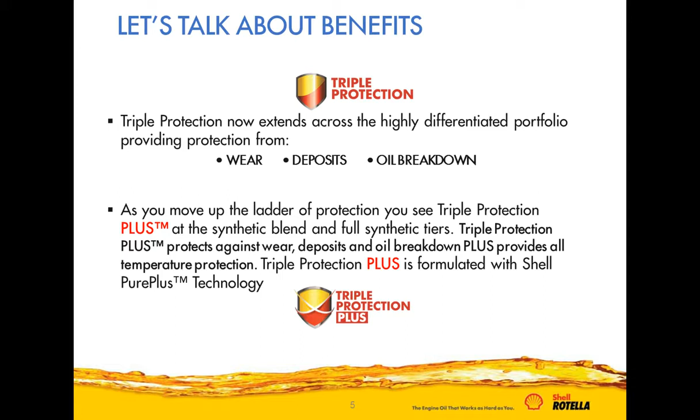The Triple Protection Plus formula's 'plus' represents Shell PurePlus technology, which is our gas-to-liquid technology. We'll talk about that more in a moment. This is a really nice summary of what Triple Protection Plus technology stands for, and a handy tool so our customers can understand the features, advantages, and benefits.

So what does it mean to you? As I said, it represents wear protection, deposit control, oil breakdown resistance, as well as all-temperature protection. A customer would care about those things because they represent enhanced engine protection, extended oil life, and better fuel economy, all of which represent a lower total cost of ownership for our customers. Again, Shell PurePlus technology is where the plus comes into play with Triple Protection Plus.

Combined with our advanced additive technology, this is what delivers all of these features and benefits. Matt will go into more of the technical details behind them.

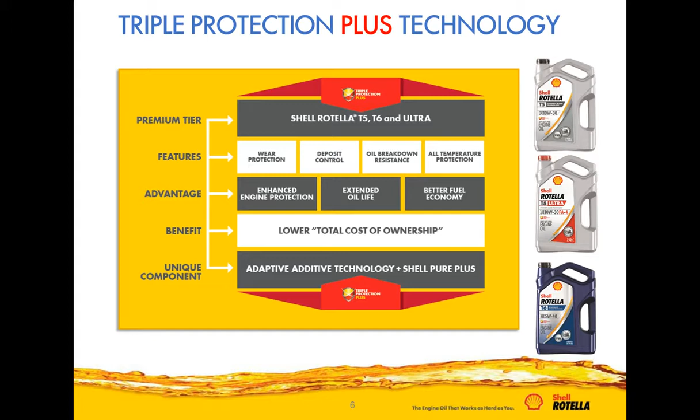So Shell GTL, or gas to liquid, is a process that converts pure natural gas into a first-of-its-kind synthetic base oil. We're using this in the Shell ROTELLA synthetic blend and full synthetic line of products. It's a complex process to develop GTL base oil using a modified Fischer-Tropsch reaction, which converts natural gas into liquid hydrocarbons. The result is Shell PurePlus base oils that are crystal clear and 99.5% pure.

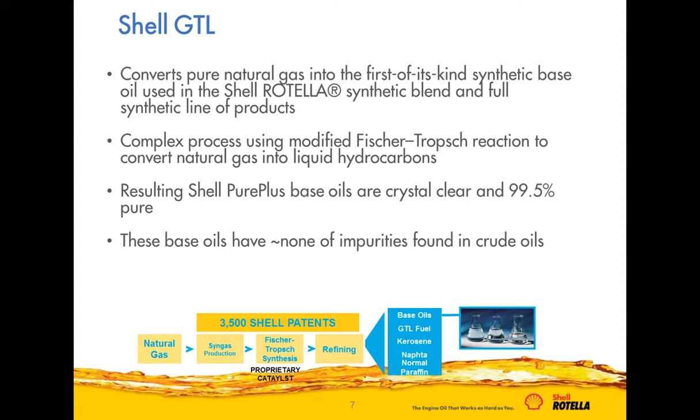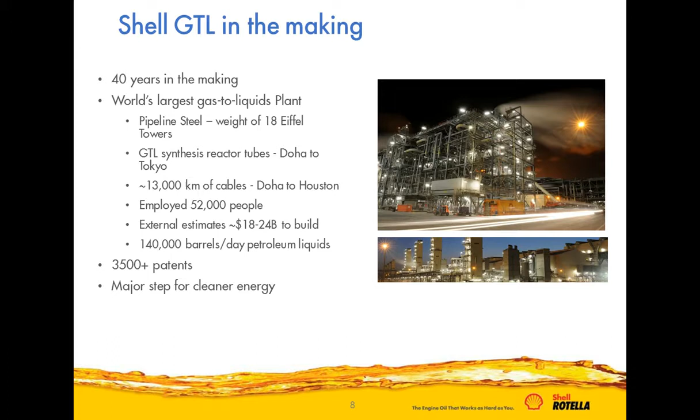Shell GTL has been 40 years in the making. We make this at our Pearl plant in Qatar, the world's largest gas-to-liquid plant. It was a huge endeavor employing 52,000 people, and we have over 3,500 patents behind this technology. It was a major step for cleaner energy and a great resource for us to leverage in our synthetic blend and full synthetic products.

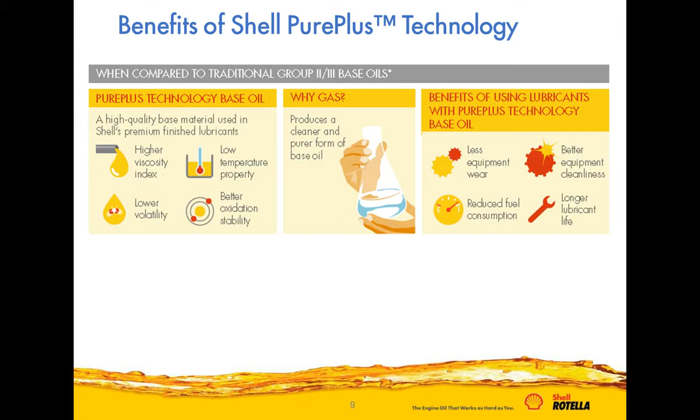Some of the benefits of Shell PurePlus technology include low temperature properties, better oxidation stability, and lower volatility. Those benefits, combined with our advanced additive technology, are what deliver the superior products we have for Shell ROTELLA.

Shell ROTELLA T5 Ultra Synthetic Blend 10W30 is our new synthetic blend that meets the FA4 specifications. This product will launch and be licensed as FA4 starting December 1st. The benefits are similar to ROTELLA T5 Synthetic Blend 10W30 CK4, but with enhancements in better fuel economy. We'll talk a lot more about this product on our December webinar.

We'll also be talking about the OEMs and the decisions and announcements they will have made by that point regarding what they recommend and allow in their 2017 and beyond vehicles, as well as any backwards compatibility. That'll be a great webinar to attend on December 12th, so look out for that invitation where we'll go into a lot more depth about this product.

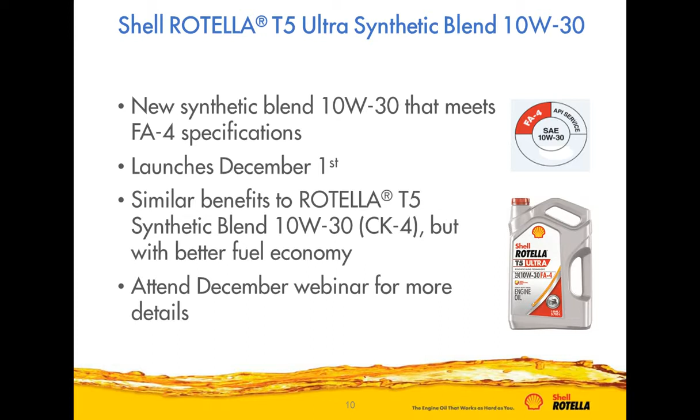So Shell ROTELLA T6 Full Synthetic. I want to talk about these products a little bit. We have 3 full synthetic products: Shell ROTELLA T6 Multi-Vehicle 5W30, one of our new products we'll talk about today, as well as Shell ROTELLA T6 5W40. Both of these will meet CK4 specifications.

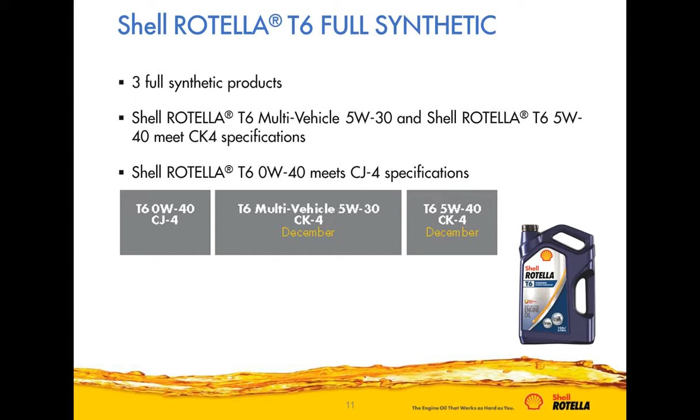And then we have Shell ROTELLA T6 0W40. That product will meet CJ4 specifications; it will not meet CK4 at this time. However, we do have plans to reformulate that product to meet CK4 in the near future. Today we'll be focusing on ROTELLA T6 Multi-Vehicle 5W30 and ROTELLA T6 5W40.

A little bit on the strategy behind Shell ROTELLA T6 Multi-Vehicle before we get into the technology story. First, remember that this is first and foremost a diesel engine oil. We do have multi-vehicle in the name, and there's a reason for that—this product will meet both diesel and gasoline engine specifications.

So it will carry the API CK4 and the API SN performance standard designations. But again, remember it's first and foremost a diesel engine oil—that is ROTELLA's heritage and legacy, and we are not straying from that. Some key benefits are that it contains Triple Protection Plus technology, excellent high-low temperature protection, and delivers a fuel economy benefit of 2.8%. We're really excited about that percentage compared to a conventional SAE 15W40.

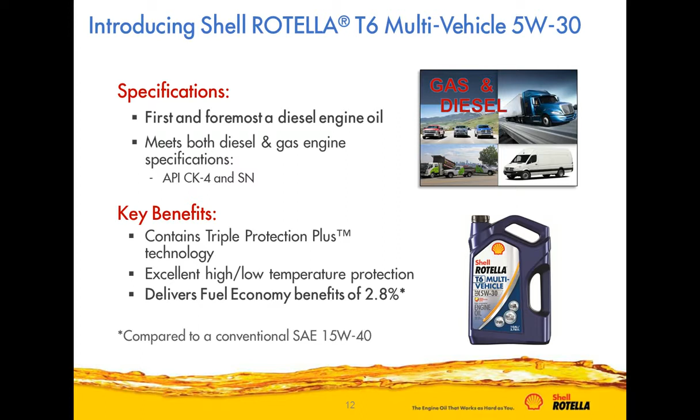Matt's going to go into a lot more depth about the technical benefits of this product in a moment. But I'd ask you, as you're listening, to remember that this is primarily a diesel engine oil, but there are a lot of applications where it will be very beneficial for our customers to run in gasoline engines as well.

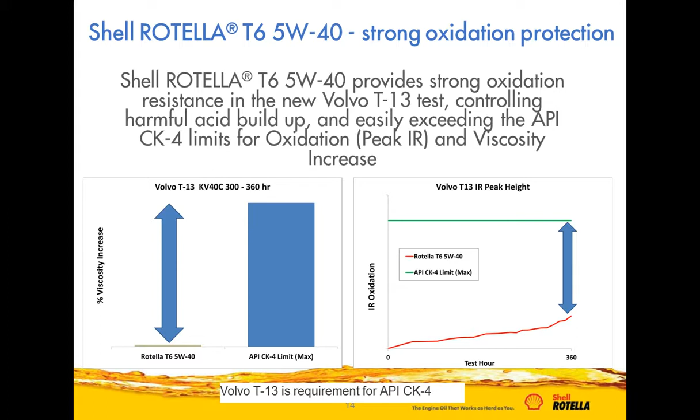There are two parameters for the Volvo T13 test: one is oxidation, or IR peak height, shown on the right-hand side, and viscosity increase over the last 60 hours of the test, shown on the left. The CK4 limits are shown in both charts, and you can see clearly the differentiation we have with this product from the API CK4 limits, both in terms of viscosity increase and IR peak height. So, very strong performance in this demanding oxidation test.

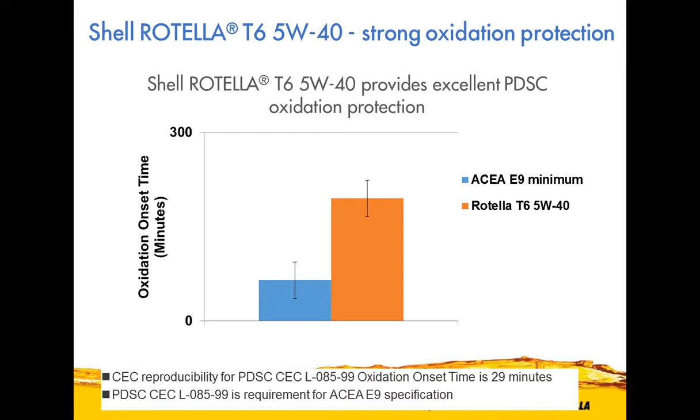In terms of a bench oxidation test, the common oxidation test is the PDSC. This is a requirement in some of the ACEA specifications. What you can see here is that ROTELLA T6 easily meets the ACEA E9 minimum, again showing very good differentiation within our portfolio as a very strong oxidatively stable product.

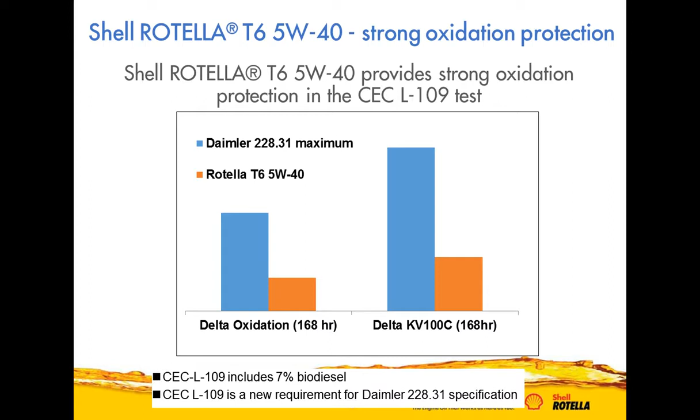There's another bench oxidation test called the CEC L109 test. This is a new test that's part of the Daimler, or Mercedes-Benz, 228.31 specifications. This test actually incorporates 7% biodiesel, making it even a bit more severe than a normal bench test. I've shown the limits for the 228.31 in blue, and where the ROTELLA T6 5W40 results come out. Again, very clear differentiation from the limit—strong performance in this test and in the presence of biodiesel.

What we've done here is look at PDSC oxidation tests, but we decided to stress the oil first and see what happened to the oxidation performance. One of the tests required for API CK4 is the HTCBT, high temperature corrosion bench test. We didn't just take that standard test—we took a double-length high temp corrosion bench test, and evaluated the PDSC at the beginning and at the end of the double-length test.

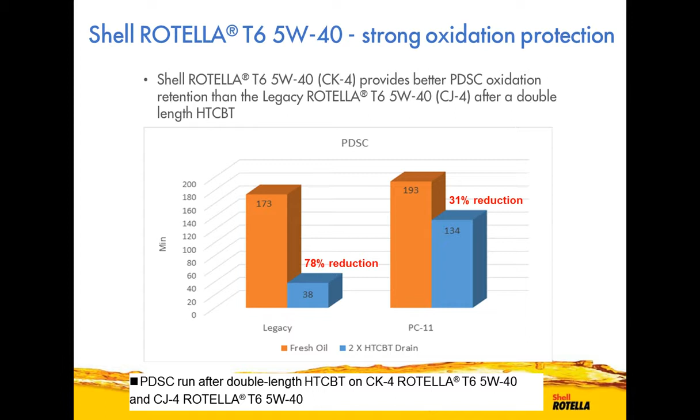I'm showing the legacy 5W40 product on the left—that's the API CJ4 formulation currently out in the market. On the right-hand side, you see the PDSC results from the new PC11 CK4 formulation. After even a double-length HT-CBT test, we're only losing about 31% of our PDSC value for the new formulation, compared to about a 78% reduction for the old product. This demonstrates that the new product is more robust in terms of oxidation protection throughout the oil life and under extreme circumstances that may be encountered in your engine.

We took that same double-length HT-CBT test and looked at the corrosion protection of the new product versus the old product—this is copper corrosion. Past 168 hours, which is the normal length of the test, the legacy CJ4 ROTELLA T6 product is starting to experience some copper corrosion, shown in the blue line, whereas the orange/red line is basically flat, indicating the CK4 oil is doing a better job controlling copper corrosion, even in this double-length test, better than the CJ4 product.

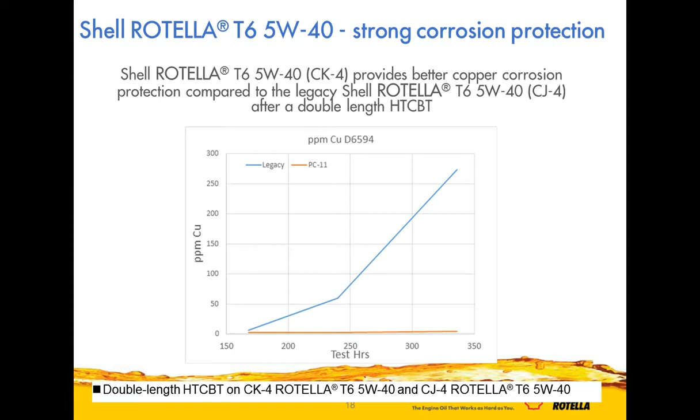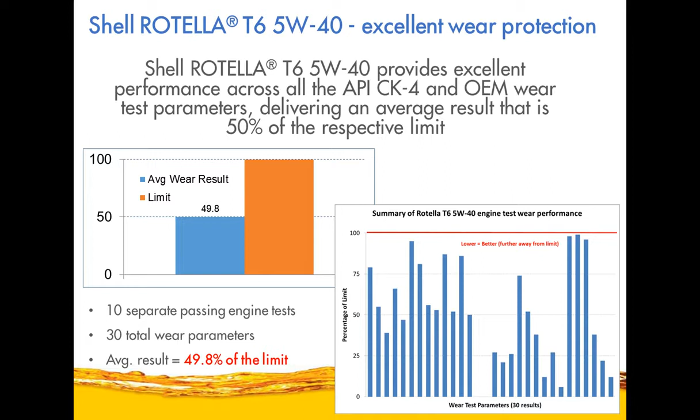Talking about wear protection, what I've shown here is the average wear protection for the CK4 5W40 product, and it comes out on average, across all the engine testing we've run, at about 50% of the respective limit—50% of whatever the top ring weight loss limit is, 50% of the crosshead weight loss limit, liner wear, whatever the wear parameter is. That encompasses about 30 total wear parameters that we looked at.

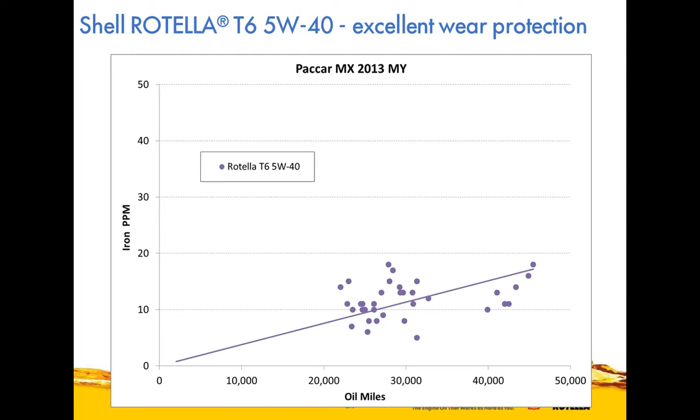In terms of field protection or field test performance, this is data from a PACCAR 2013 MX engine, and you can see that the wear is quite low for this product, the T6 5W40, even out past 40,000 miles, which is the recommended oil drain interval. We're not seeing wear numbers above 20 parts per million, so very strong in terms of wear protection in the field.

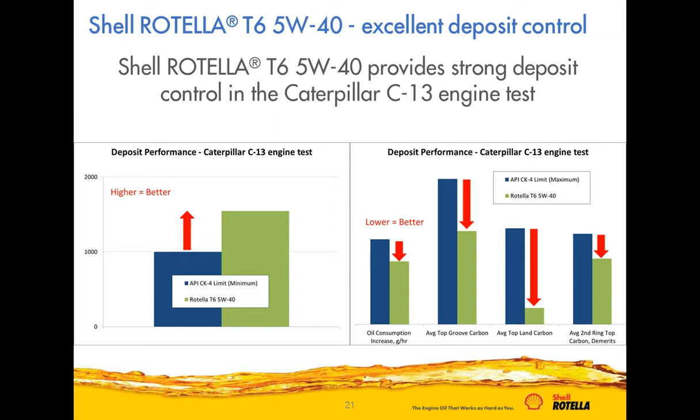In terms of deposit control, we looked at the C13 engine test, which is part of the CK4 parameter. The limit for that is 1,000, as shown in blue on the left, and you can see our result was considerably different, or better, than the CK4 limit. If you look at the individual parameters that make up that 1,000 merit result, again you can see our performance is much better than where the CK4 limits are in this test.

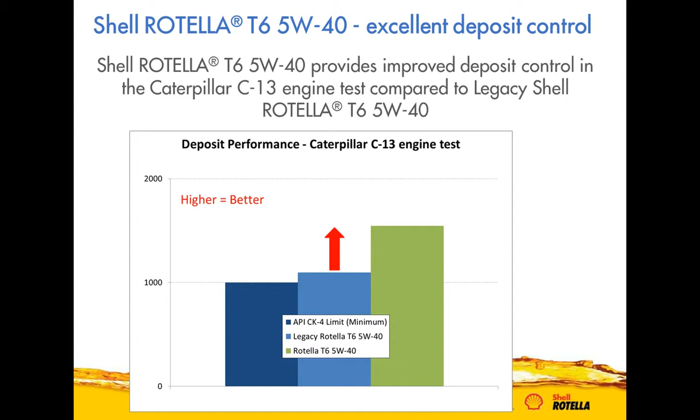Again, looking at the C13, we are comparing in this case against the legacy CJ4 product, which just barely met the Caterpillar C13 limits. So again, clear differentiation versus the limit, and clear differentiation versus the CJ4 product that's been in the market and has been working real well for about 10 years.

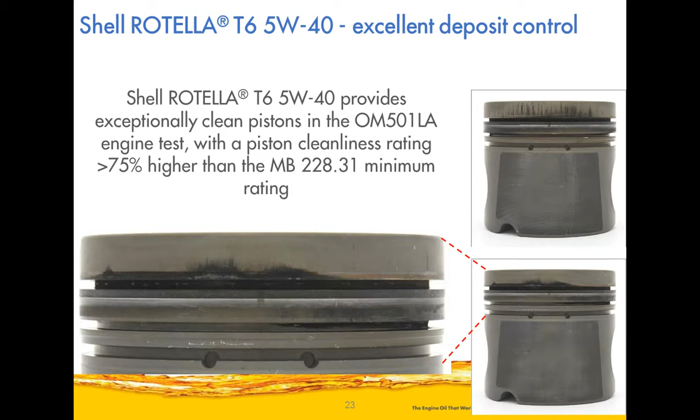Sticking with deposit control, here we're looking at some pistons from the OM501LA test. This is a test requirement for the Mercedes 228.31 requirement, a piston cleanliness test. What you can see here is the top lands and top grooves of the pistons. When these parts were rated, the result came out about 75% higher than the minimum rating. In this case, the higher the rating, the better, and it's more indicative of a cleaner piston. So again, good demonstration of performance that not only meets but exceeds the limits.

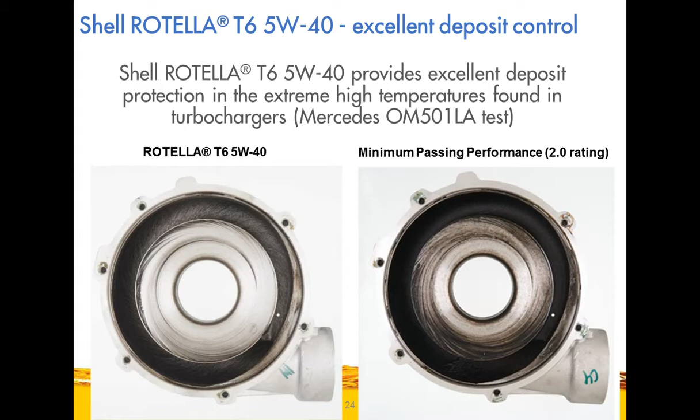The same Mercedes 501LA test has a turbocharger deposit measurement in it. The requirement is that it has to be better than a 2.0 rating, where lower is better. What you see on the right-hand side is what a turbocharger that just barely meets the specification would be at 2.0, and then you see the ROTELLA T6 5W40 turbocharger deposits on the left-hand side, again clear differentiation from a borderline passing formulation.

Again, sticking with the 501LA, our result is considerably better than the CJ4 legacy product that's been out in the market, by roughly about 25% in terms of OM 501LA piston cleanliness merits.

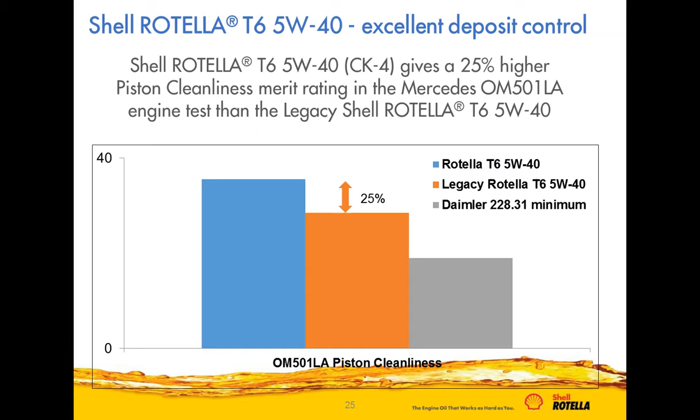In terms of low temperature flow, we worked with an outside company to run an engine test, a motored test inside a cold box, to measure the time it takes to flow from the oil sump to various parts of the engine. In this case, we're looking at the oil sump flow up to the front gallery and the rocker covers, or rocker shaft, I should say.

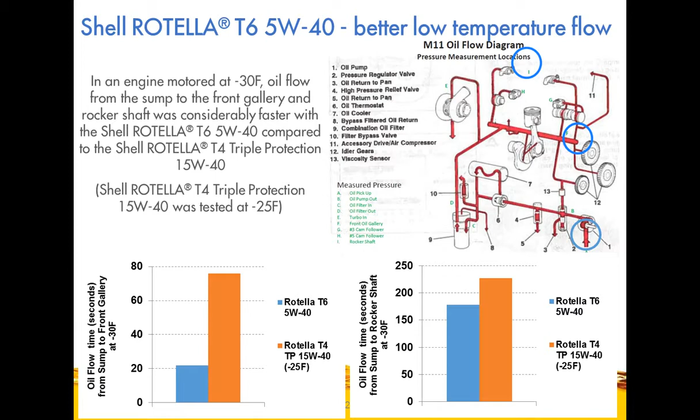What you can see is we ran the T6 5W40, shown in blue on the two charts there, and we ran the ROTELLA T4 triple protection 15W40. We actually had to run the triple protection at 5 degrees warmer because we had issues with it even flowing at minus 30 F in this test. But we're able to demonstrate clear differentiation between the oil flow required to reach these different parts of the engine under extreme low temperatures, between the 5W40 full synthetic and the 15W40 product. This is primarily a byproduct of the GTL base stocks and the fact that it's a full synthetic formulation.

So now I want to transition over to talk about the T6 Multi-Vehicle 5W30. As Megan mentioned, it is primarily a CK4 formulation. It will meet API SN, fully meet API SN, and be licensed against SN. It will meet the phosphorus requirements of API SN of 800 ppm phos. So it will be fully licensed against SN, and on our product labels it will show as meeting CK4 SN. It will also meet the new OEM specifications tied to API CK4, as well as the Mercedes 228.51 specification. This is a gap we have in our portfolio for North America today, in that there is some OEM equipment that calls for a 228.51 formulation, and this product will be able to serve those needs come December timeframe.

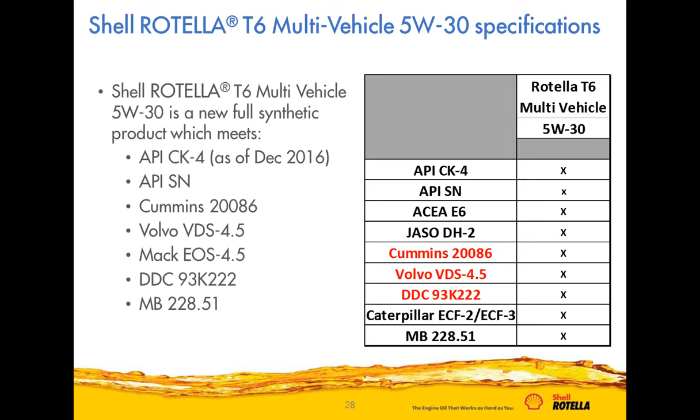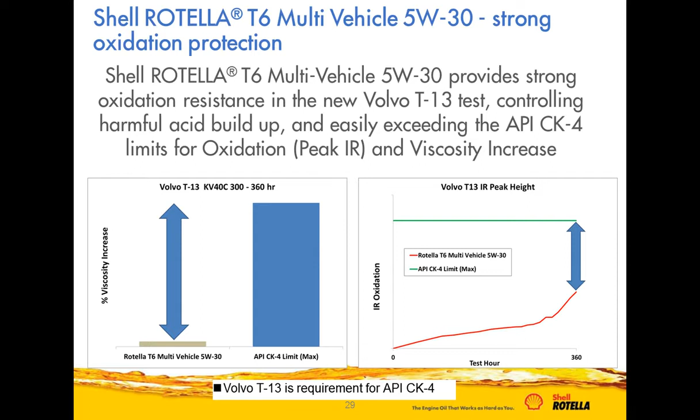So what you're going to see is a lot of the same structure of slides that I showed for the 5W40. Again, looking at the Volvo T13, that demanding oxidation test that's part of the API CK4 category, you see very good performance for this product as a 5W30 formulation against the API CK4 limits for viscosity increase on the left and IR peak height on the right.

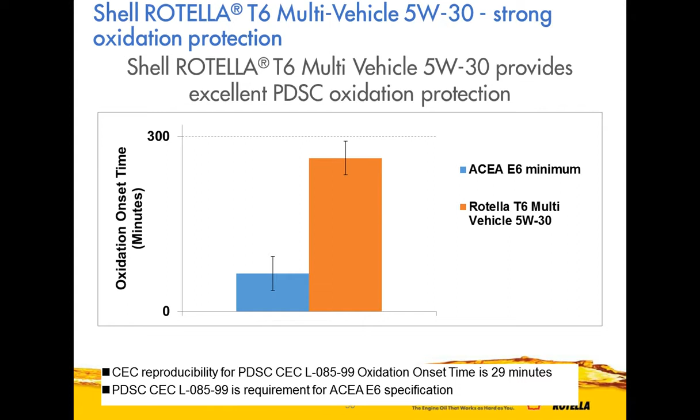Again, in terms of PDSC oxidation, the ACEA E6 minimum is shown in blue, and there's clear differentiation from the T6 Multi-Vehicle 5W30 on the right-hand side.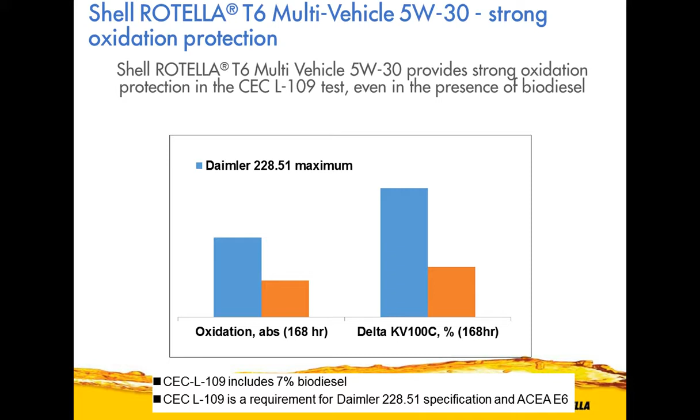Similarly, with the CEC L109 test in the presence of biodiesel, again you see the limits, the Daimler limits, on the left-hand side, or in the blue column, and the clear good performance of the 5W30 product in the orangish columns.

In this case, we're looking at the high temp corrosion bench test, the normal test duration, and what I've shown is the API CK4 limits for copper and lead. Lower is better here, and you see very good performance in this test in terms of copper corrosion and lead corrosion for this product.

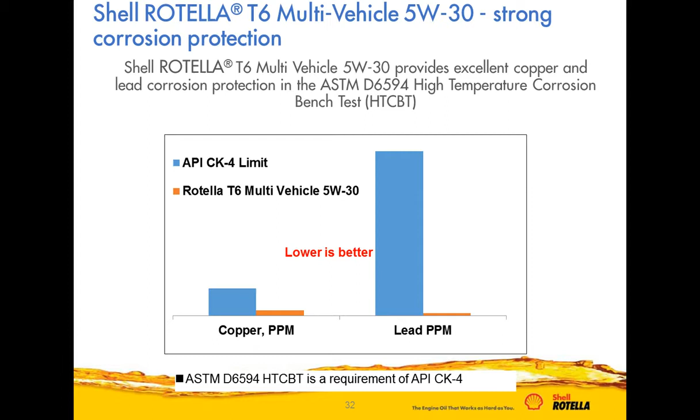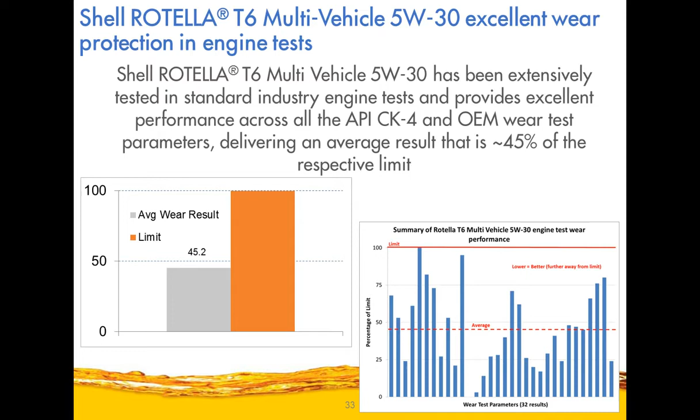Similarly, as we showed before, the wear protection. In this case, we're looking at roughly 32 different wear parameters, and again we're seeing an average wear result that's about 45% of whatever the respective limit is.

In terms of field testing, what I've shown here are data from two different field tests. The chart on the left is from 2015 Detroit Diesel DD15 engines, and the one on the right is PACCAR MX 2013 engines. What I wanted to highlight is the performance of the 5W30 is basically equivalent to the CK4 15W40 performance. So we're able to demonstrate that we're not seeing a compromise in engine wear, at least in these two field trials, between a 5W30 CK4 product and a 15W40 CK4 product. This should help customer acceptance of this lighter viscosity grade, showing you're not sacrificing wear protection while obtaining some additional fuel economy.

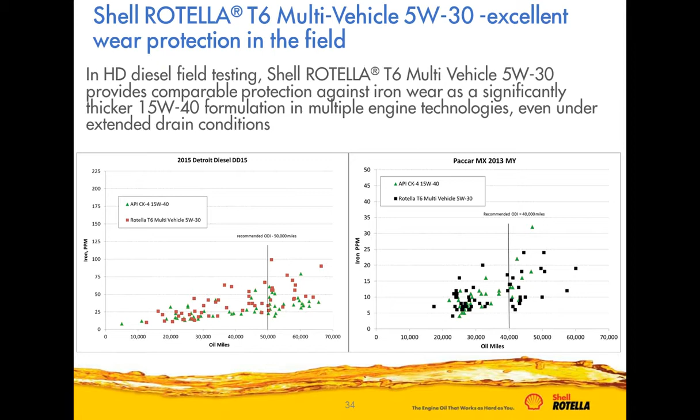What I've shown here is some engine tests around deposit control, showing engine sludge and varnish data from the various engine tests we've run. Up on top, the average result came out to about a 9.4. A 10 rating is clean, so these are very good sludge and varnish results.

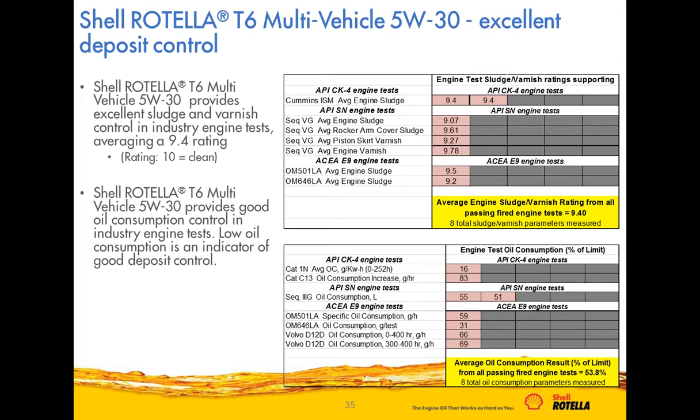On the bottom chart, we're showing the oil consumption, again normalized versus the limit, across the various engine tests we've run. The average oil consumption result was just over 50%. So this oil is doing a good job controlling oil consumption in the engine, reflecting good control of deposits in the top of the piston.

Again looking at the 501 LA engine test. In this case, as I mentioned earlier, we're approving against the Mercedes 228.51 limits, or 5.1 specification. This specification has higher quality limits than the 228.31, which is what we showed for the 5W40. Again, you see very good performance and clean pistons, and our piston cleanliness rating was roughly 30% higher than the minimum requirement for 228.51.

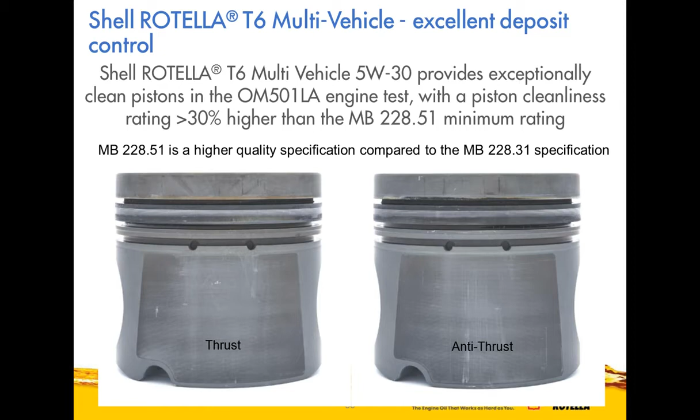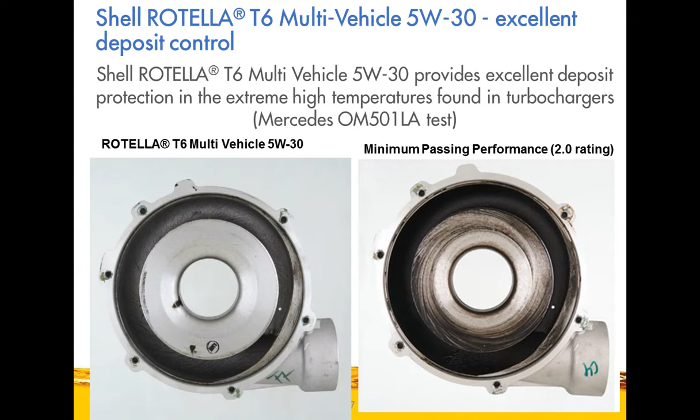Again showing the turbocharger deposits. The turbo deposits on the right are a 2.0, a borderline passing oil, and the T6 multi-vehicle turbocharger results on the left-hand side are extremely clean and considerably better than that just borderline passing result.

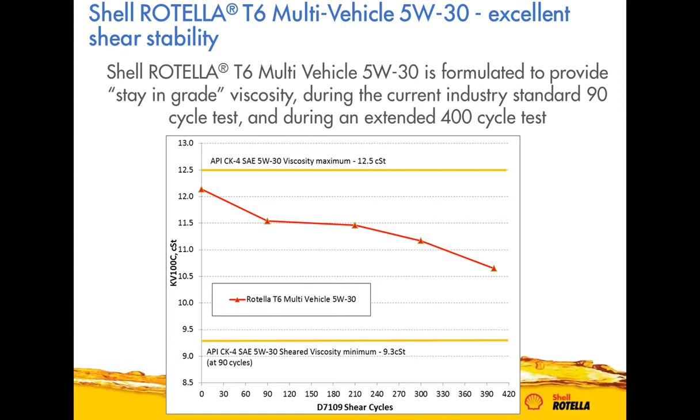In terms of shear stability, this product is formulated to provide stay-in-grade shear stability not only at the standard 90-cycle test, but also during a test extension out to about 400 cycles. You can see we start out at the high end of the SAE 30 grade, and after about 400 cycles we're still well above the minimum shear viscosity requirement for an SAE 5W30.

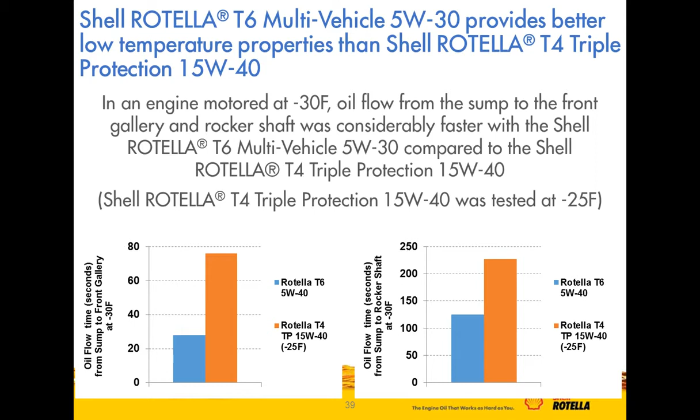Similar to the data shown earlier on cold box testing for the 5W40, we've also run the T6 5W30. I haven't shown the diagram from the previous slide, but it's the same measurements: the time it took to flow from the oil sump to the front gallery, and the flow from the oil sump to the rocker shaft. Again, you see clear differentiation versus the 15W40, which needed to be run at a warmer temperature just to get the oil to flow all the way through the test in the time allotment.

So we mentioned that this product meets API SN. The next set of slides here are going to be about the API SN engine tests.

This first slide is a sequence 8 engine test, which measures corrosive bearing weight loss. You can see the API SN limit and where the T6 multi-vehicle 5W30 product is — again, very good in terms of corrosion protection in this test.

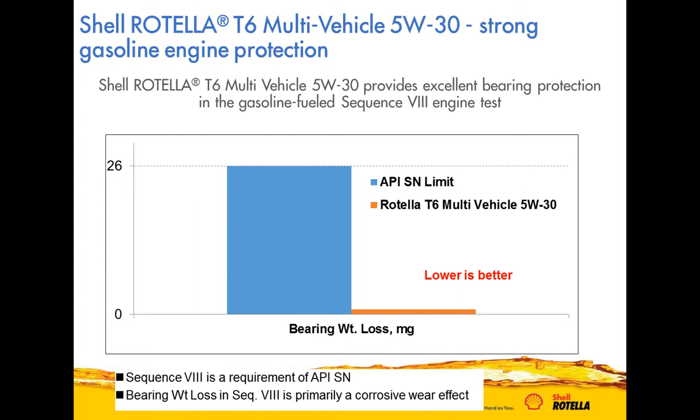Next test is sequence 4A, a cam wear test. Again showing the API SN limit in blue and the clear differentiated product result for the 5W30 in orange. Lower is better in this test, indicative of less wear in this gasoline engine test.

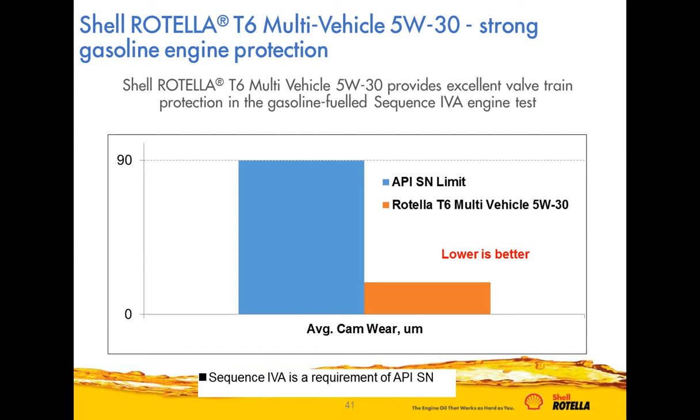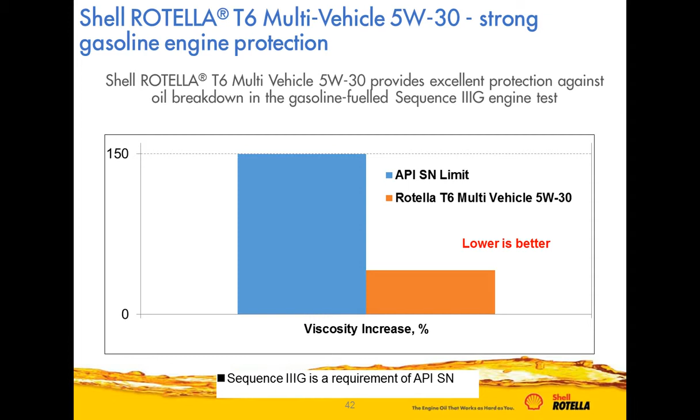In this case, we're looking at the sequence 3G, a gasoline oxidation test. Like what we saw with the T13 and other oxidation testing on the diesel side, even on the gasoline side this product performs extremely well in terms of controlling oxidation. You can see the limit, the API SN limit, and the T6 multi-vehicle clearly better than the API SN limit.

Here we're looking at deposits. This is the sequence 5G test, again measuring sludge and varnish protection. You can see the limits for the various rating areas: average engine sludge, rocker arm cover, piston skirt varnish, and average engine varnish. The blue columns indicate the minimum merit rating you need, and you can see our results, the 5W30 results in orange, very good, easily meeting or passing the requirements, and very close to that 10 clean rating.

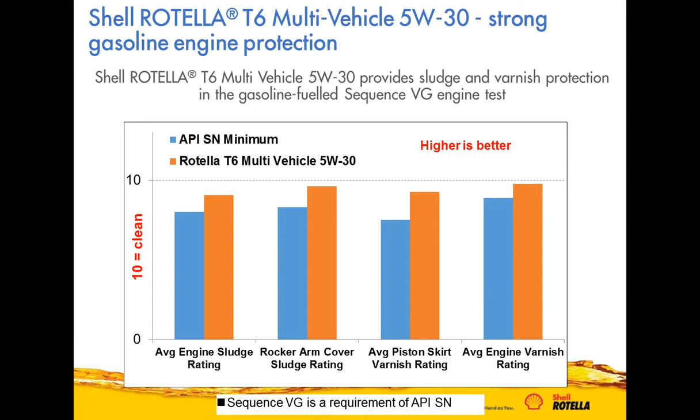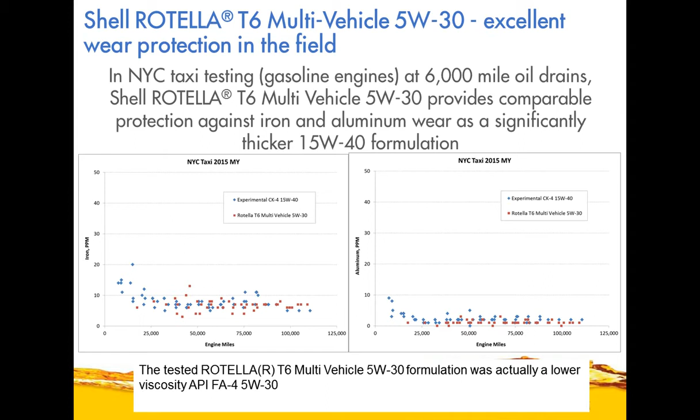In terms of gasoline field testing, we run this product in some New York City taxis. These are running at 6,000-mile oil drains, basically double the recommended oil drain interval. What we're showing here is a comparison against the 15W40 formulation, and basically you're seeing no compromise in terms of wear protection in going from a 15W40 to a 5W30 CK4 formulation. In fact, the formulation shown here was actually a lighter viscosity version of this T6 multi-vehicle 5W30 formulation, so you could argue the commercial formulation would be directionally even better than this.

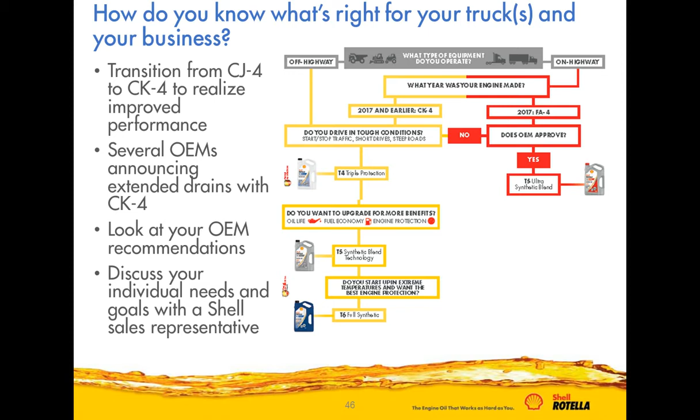So how do you learn more? If you want more information about the next evolution in hardworking protection, there are many places you can go. Rotella.com is a great place to start. We have several videos on the website, product information, and links to product brochures. The website will be updated shortly for our products launching in December, so stay tuned for more of the product details like you've heard talked about today.